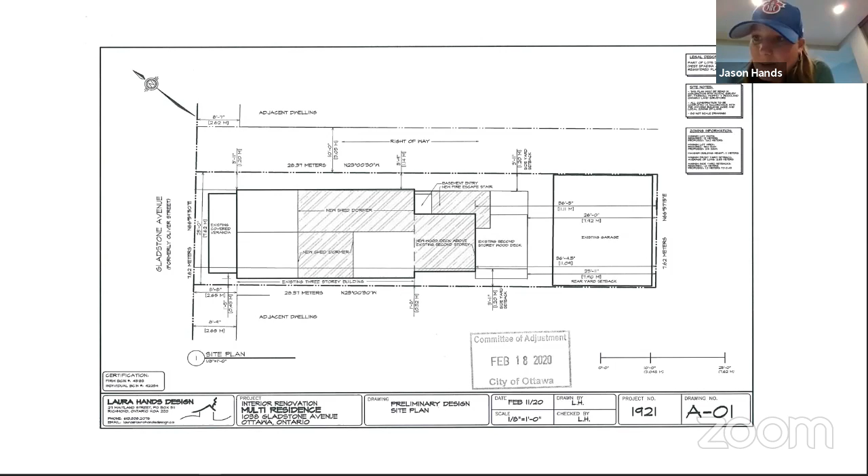And then our last minor variance would be for amenity space. So in the rear yard, we would like to add amenity space for 34 square meters, where the bylaw requires a minimum of 45. But we would like to gain some space by using the second floor deck that is existing, as well as creating a third floor deck for the third unit up on the third floor. So we would gain an additional 13.98 square meters on the second floor and an additional 14.60 square meters for the second and third floor decks. That's 28 square meters of additional amenity space not at grade.

That is correct, yes. Do we have elevations for your project? Yes, there were elevations that were submitted with the whole package. Oh yeah, there you'll see. You're looking at the front, well, and the rear elevation. And side elevations? That's correct. So that would be the westerly side here that you're showing.

So the existing deck is at the second floor level? Yes, that's correct. And the new deck- however, we're going to be creating a third floor deck as well, because this is going to pose as a secondary exit for the third floor unit.

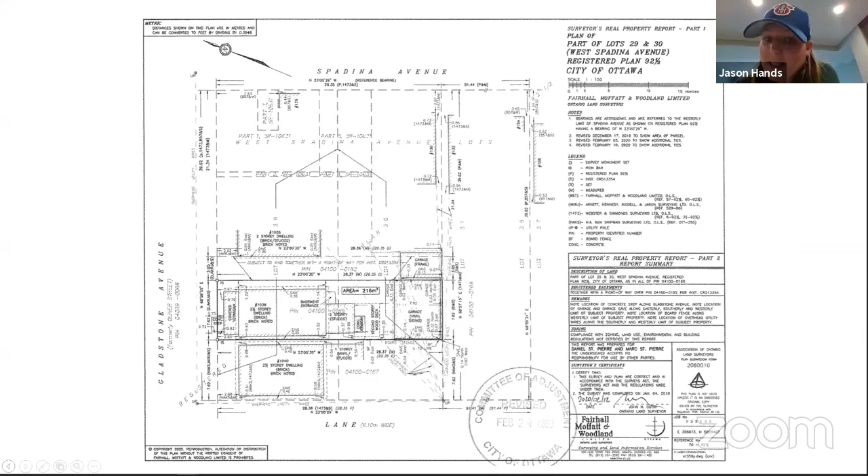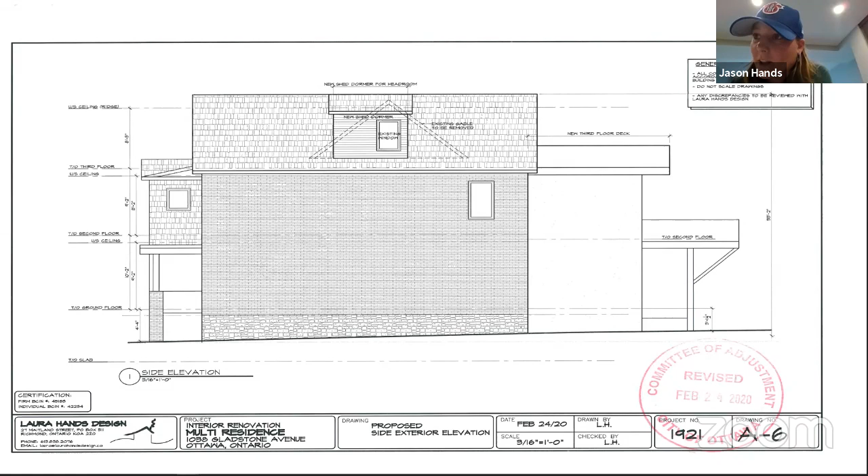And what about privacy screening for that new deck on the third floor? So privacy screening will go up on the west side. On the west, yes, this side. A privacy screen will go up on the third floor deck. And how tall will that screen be? That screen will be 5 feet in height. Okay, and only on the west side, not on the east? This is correct. We're quite a ways from the property line on the east side, and the privacy screen will be required on the west side on the third level deck.

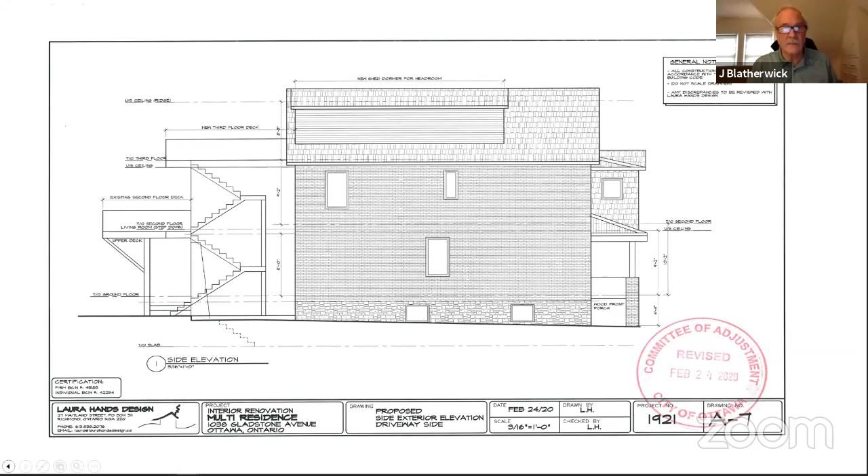There's no privacy screen on at the existing second floor deck level? No, so that deck. Is there an intent to put a privacy screen on that particular deck, the one that's existing? Yes, and the same height as the one for the third floor? That is correct.

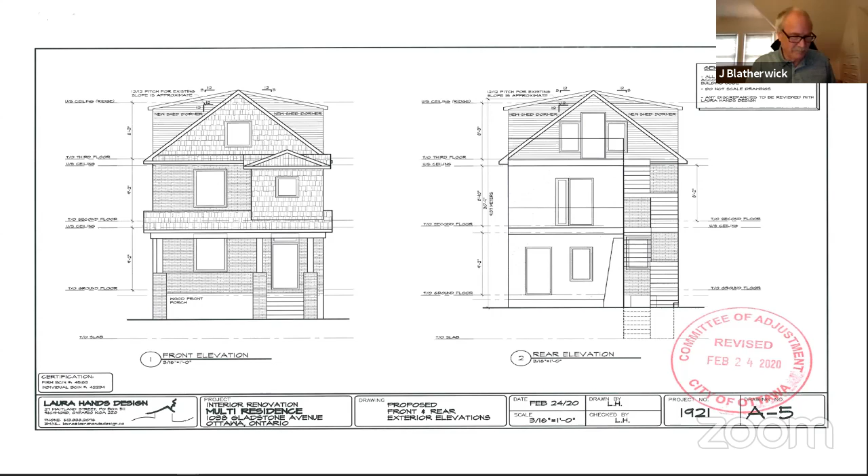So in your opinion, your application meets all the 4 tests of the Planning Act? Yes, it does. And how would that do that? Just one moment, so I just need to go run and get my file for that. Sorry about that.

My variances are minor. All of them, except for the amenity space, is existing conditions. My variances are appropriate for this development and use of the property. No new setbacks are being requested. Only existing conditions are going to remain.

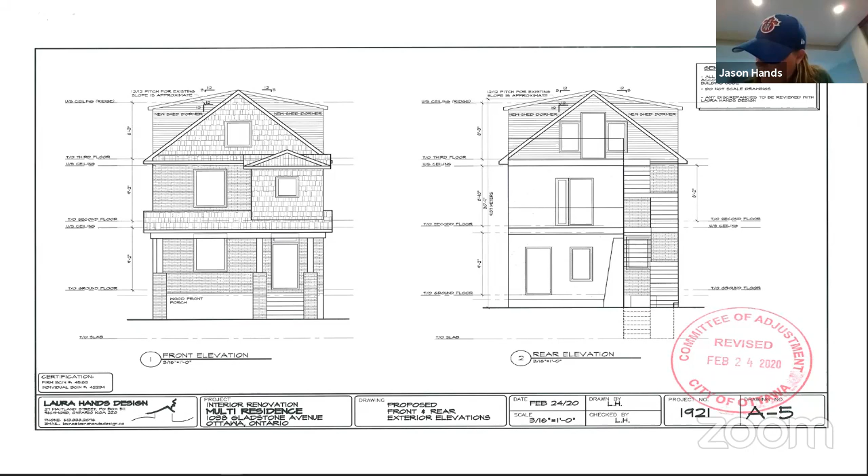The intent of the zoning bylaw is maintained. And the official plan is also maintained because we're going to construct a legal triplex to maintain growth within the urban area.

You were aware of the comments from Building Code Services to obtain a permit prior to construction? Yes. And Hydro Ottawa maintaining clearances to the overhead area? Yes. And from the Ministry of Transportation of Ontario, their approvals and permits are required prior to construction and or demolition of any buildings and or structures, and prior to the issuance of any municipal building permits or approvals. So they request that they are circulated with all proposed changes and development to the subject lands. You're aware of MTO's request? Yes, I emailed the Committee of Adjustment and they sent me all of the paperwork.

We also note that there is a letter from the Hintonburg Community Association in support of your proposal. Yes, I had met with them some time ago, possibly about February. In one of their meetings, I brought the drawings and explained everything we have discussed already today, and they were in favor of what we're planning on doing with the building.

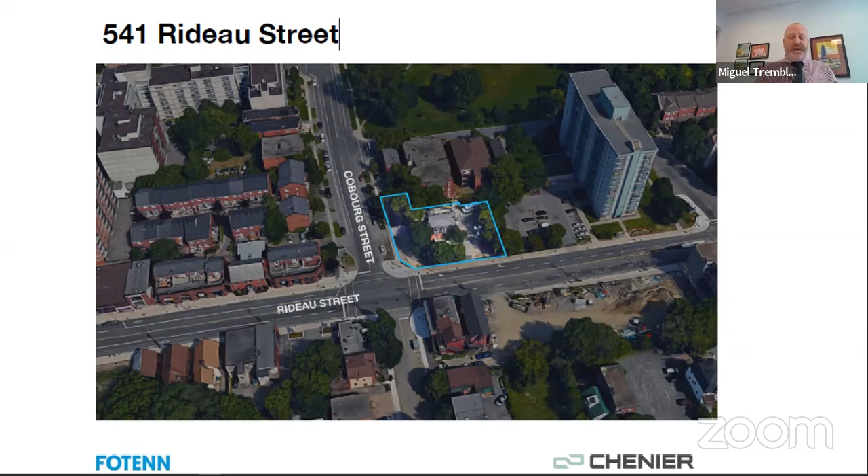Just in terms of history for this project, a zoning bylaw amendment was approved in October 2018. To be clear for the committee's benefit, the rooftop amenity space, although slightly smaller in that version, had consistently been shown on those plans. The issue, though, is that the zoning details approved by council did not fully reflect the rooftop amenity. It wasn't picked up by staff or us, and we were relying heavily on section 64, which in fact does not permit rooftop amenity space to project above the maximum height of the building. So site plan approval was issued in October 2019, about a year later.

But the rooftop amenity space was removed from the site plan so that building permits could be issued following site plan approval, with the understanding that at a later time we would have to seek a minor variance to construct the rooftop amenity area as previously shown.

Also, given that the zoning is still relatively fresh and not yet 2 years old, we had to seek approval from Planning Committee and City Council to be able to apply for the variance. So in November 2019, there was a staff report detailing what the variances were going to be, and it was approved unanimously by Planning Committee and City Council, entitling us to submit these applications.

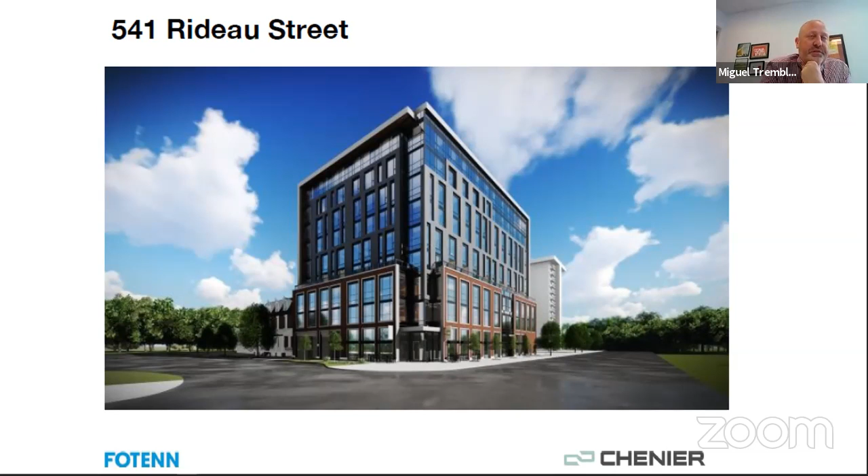It includes both amenity space on the ground level, and then all of the brick area you can see. This is not the site plan — I chose the building permit drawing just because it's a lot more detailed as to what's going on the roof. So I selected this plan, but all of the brick area amounts to about 129 square meters of rooftop amenity space. The rooftop amenity space is still permitted under the current site plan, current zoning, and current building permit.

But the desire now is to enclose the blue portion, which is about 90 square meters, and it would be immediately abutting and connected to the rooftop mechanical penthouse. All of the white that's enclosed there is part of the rooftop mechanical, which is actually larger than the area that we're proposing for the amenity space.

You remember there was an OCH building, that's to the right on your screen. The enclosed area of the amenity space would be about 6.4 meters from the edge of the building, which also coincides with the easterly property line, and then about 15 meters to the rear property line.

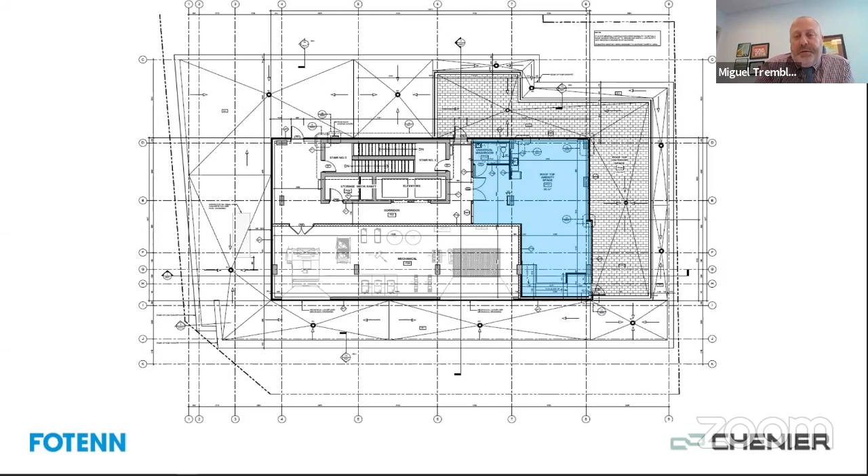So if you think back to the graphic I showed of the building elevation, it's more than unlikely that anybody would even see the area of the enclosed amenity area, given the perspectives of the building. Truly, the only people that will be able to see it are those in the OCH building on the upper floors.

So this is the elevation on Rideau Street. Again, it's seen at a vantage point that no one else will see, but the orange area corresponds with the area that's proposed to be enclosed, and you can see that it's the same height as the abutting mechanical penthouse. The mechanical penthouse runs to the west.

It includes those little beige sheltered areas and even a projection above and beyond that. But the intent is to simply run the roof line of the mechanical penthouse, incorporating it into the architecture of the mechanical penthouse, so it'll be roughly at a height of 4.8 meters, matching the abutting mechanical penthouse.

Actually, when council originally considered the zoning bylaw amendment back in 2018, the rooftop mechanical was shown on those plans. So council, on two occasions now — when they approved the zoning in 2018, and again when they allowed us to move forward and submit for the minor variance — considered it and felt it was appropriate, still maintaining the intent of the OP for a 9-story building.

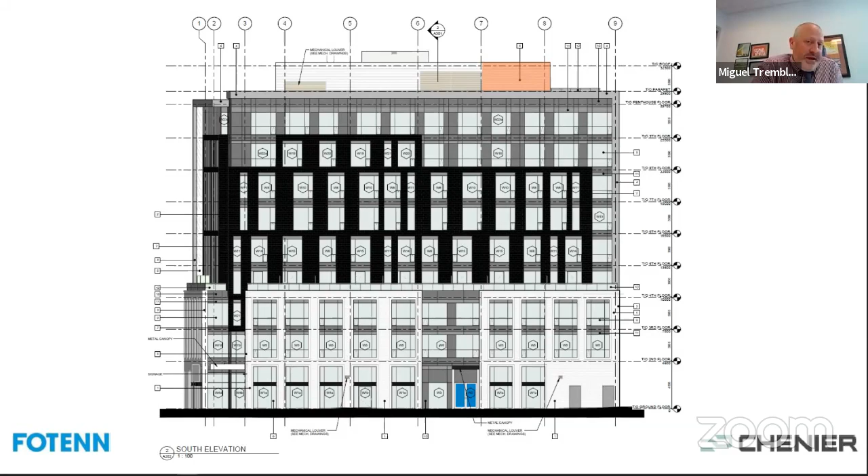And in terms of whether it's minor in nature, my intent is always to measure whether it's minor in terms of impacts, and I can't distinguish, nor can staff, any adverse impacts on abutting properties. So, anyway, that's my presentation. I'd be happy to answer questions.

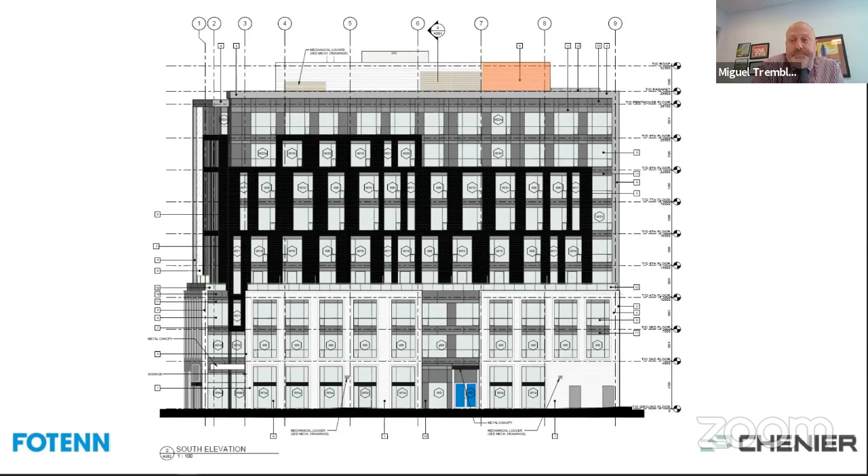You mentioned that the mechanical cap was approximately 4.8 meters higher than the deck. Is that an actual height, or an approximate height? No, I measured it from the building permit plans.

Does any of the members have any questions regarding this application? No, no, Mr. Wildman, no. Ms. McLean, Mr. Wilder, no, okay. Excuse me, Chair, Ms. McLean has her hand up for a question. Go ahead, Ms. McLean. Oh, I can't hear her, she's muted. Try now, Heather. I'll ask the question again.

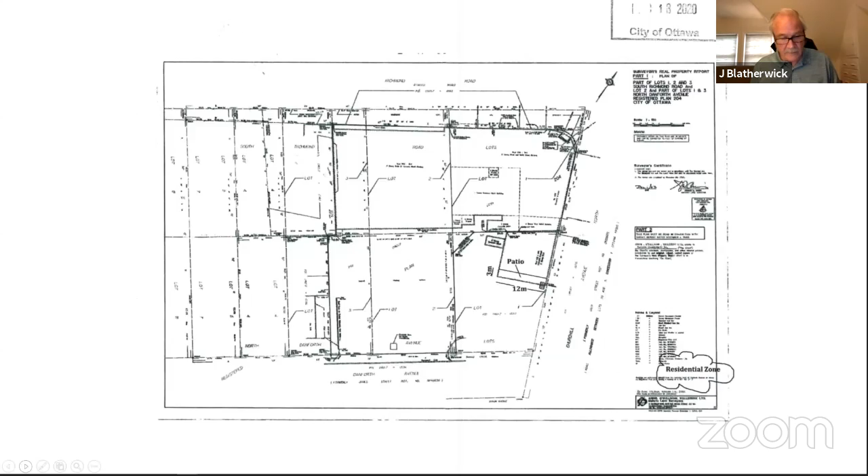This application is for a minor variance to permit an outdoor commercial patio with a seating capacity of 20 persons, to be located 12.3 meters from a residential zone without a screen or structure separating it from a lot in the residential zone. This application is for 412 Churchill Avenue North.

Before you proceed with your application, Mr. Dunstone, we have one question: has this patio already been built? It's actually been existing for about 12 to 15 years. What happened recently is the patio underwent a facelift. There was no alteration or structural changes to the piers or supports, so basically essentially new wood, but for all intents and purposes the patio has existed for many years.

And that was a legal patio that existed for many years? Not sure. The reason we bring a variance today is because we're applying for a liquor license, and a number of municipal approvals now kick in, as you know. We do have a letter and stamp drawing from an engineer which shows the patio is sound and built in accordance with building code.

Well, if you'd like to proceed with your presentation, Mr. Dunstone. Thank you. So we have a patio at the south side of Equator Coffee Shop, on the west side of Churchill. You enter the patio at grade off Churchill. A patio operating with a restaurant obviously needs to meet the zoning bylaw, which currently it doesn't.

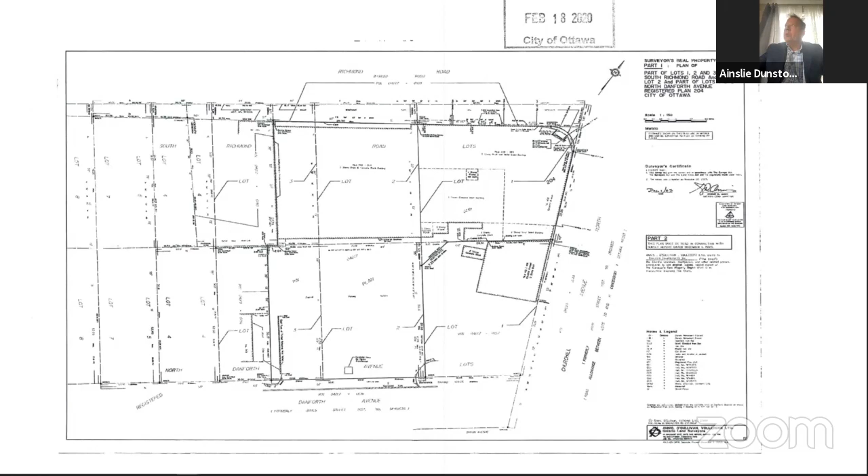Residential lot. We are proposing, as you mentioned, 20 patio seats, fairly subdued hours of operation, in line with the hours of operation of the cafe currently, which are 7 a.m. to about 6 to 7 p.m., or 11 p.m. between the months of April and October, patio season. So which time frame is it during the day? Is it closing at 6, 7, or 11? 11. And that's 7 days a week? 7 days.

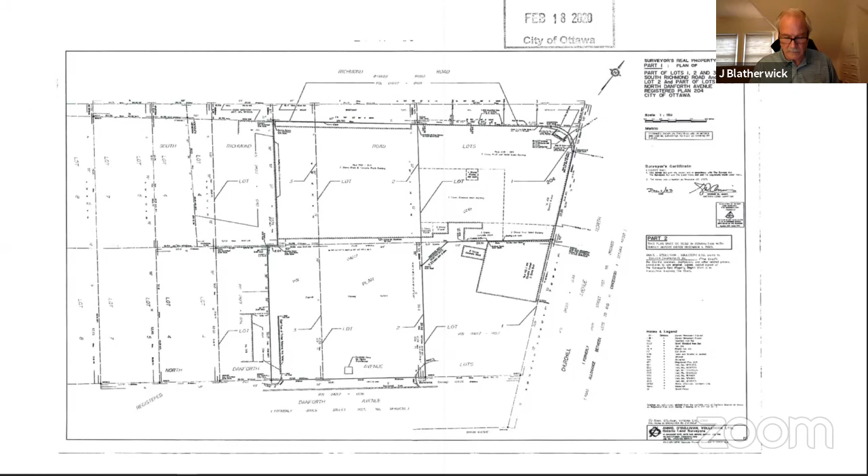We have a frozen feed. You still hear me? I'm here, yeah, we lost you there for a second. So the hours of operation are up till 11 - what time again, starting? 7 a.m. to 11 p.m., 7 days a week. Okay.

And you intend to serve liquor on that patio? Yeah.

The lighting will be very minimal and very subdued, like wall lighting, just enough lighting for safety purposes. Music as well will be very subdued and will cease at the time of patio closing.

You have a design for this patio? What's it gonna look like? Everything I do, everything's been filed with the committee. Okay. And that's the site plan right now? That's right, that's the engineer's drawing of the patio.

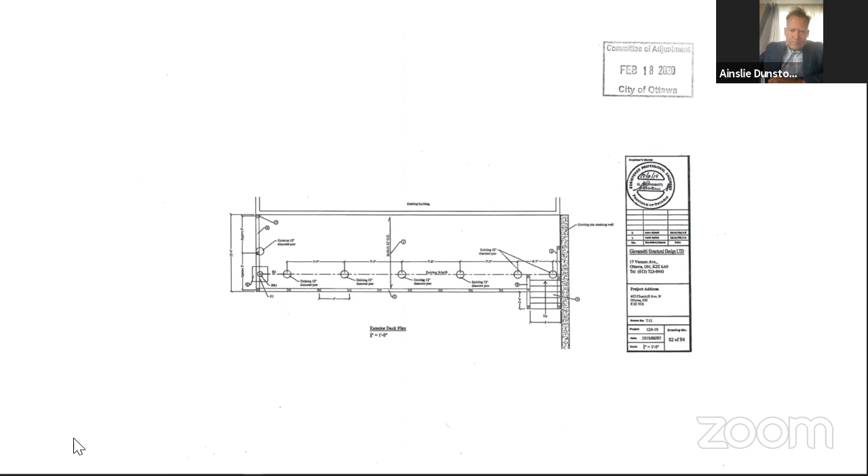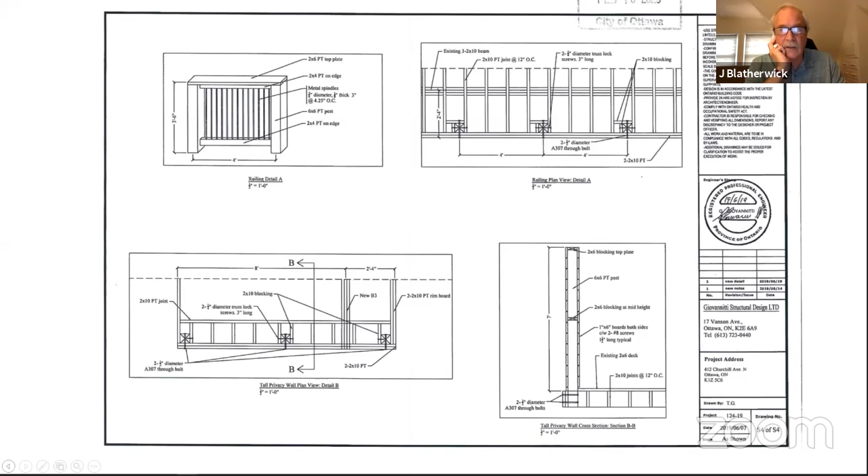If you have additional file plans, I can show you. So this is just the structure of the patio. And the walls on the periphery of the patio are how high? They are 36 inches - the railings surrounding the patio are 36 inches high.

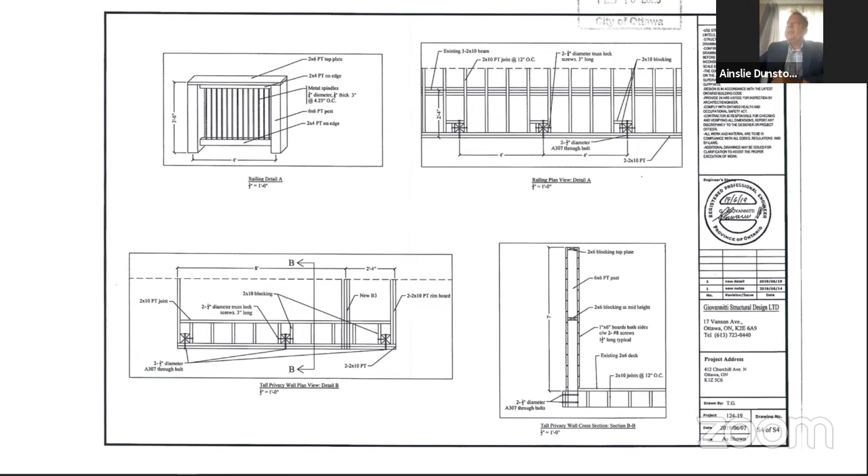Right. And how close is the nearest residential property to the patio? It is 22.3 meters to the closest residential zone, and that would be to the southeast of the patio.

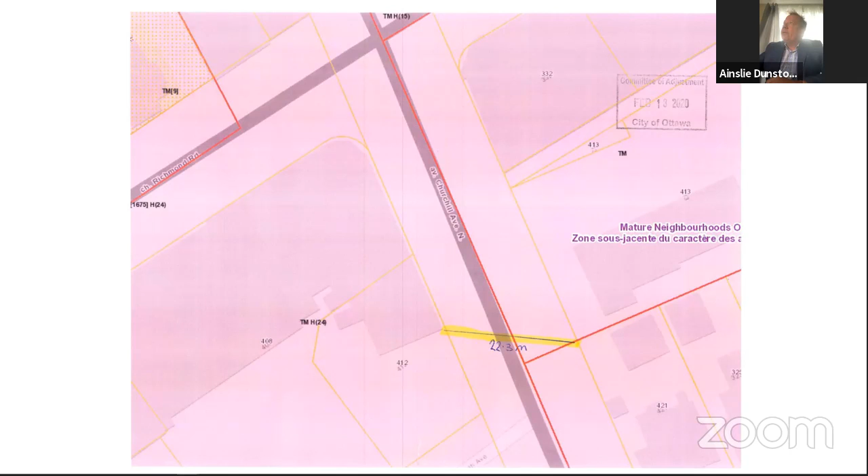Now, however, the first two buildings, the first two squares just south of the red line, these are commercially occupied buildings, businesses, design companies. So although it's in a residential zone, there are no residents in that building. So I took it to be the first immediate actual resident buildings to be the buildings on Byron Place to the south, that being 474 Byron Place, 470 Byron Place, and then 325 Byron Avenue, and 21.

Is there anything more that you'd like to add to your application? Well, in my application cover, I did address the 4 tests. And if you wouldn't mind just reiterating that. Sure.

It's a general zoning bylaw. A licensed cafe is a permitted use in this zone, and a licensed patio should be operated in connection with this cafe. Also, the subdued and mild lighting and low background music will ensure that the intent of the bylaw is met to protect the peace and privacy of residential neighbors. In addition, as I mentioned, there are other examples of licensed patios in the immediate area as well.

All right, welcome. Mr. Donkin, are you going to be making the presentation? Yes. This application is to permit minor variances to permit the main door of a newly constructed home not to face the front lot line and not to face the street, to permit a reduced lot width and reduced corner side yard setback. It is proposed to demolish the existing dwelling and construct a 2-story detached dwelling with a secondary dwelling unit in the basement. So if you'd like to proceed with your application, Mr. Donkin.

Yeah, the first and most difficult variance is the main door, which comes from the infill bylaw. It says that the main door has to face the front of the lot, which is deemed to be the narrowest frontage. So in this case, it would be required to face Byron. We thought it was more appropriate for it to face Kensington. So although the request says it doesn't face the street, it does face a street, Kensington.

Yeah. We did that for a couple of reasons. One is it takes foot traffic off Byron, which makes it a little bit safer. It allows us a more efficient plan on the house itself. And it's a more desirable address being Kensington than Byron.

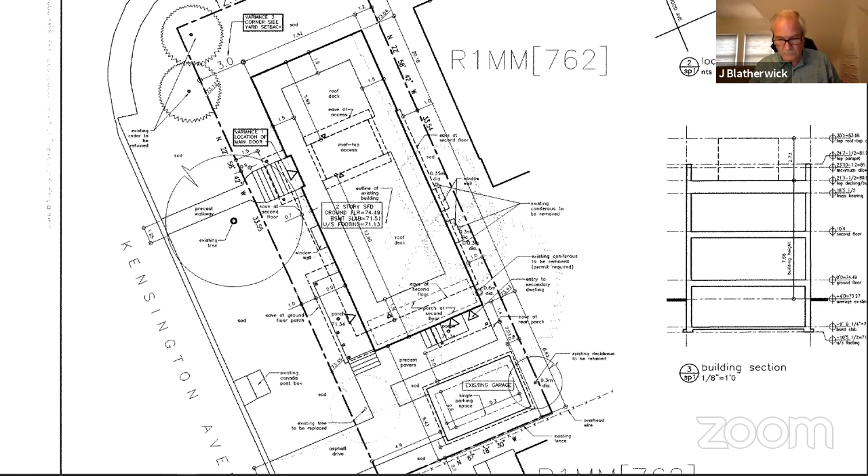The second two variances really come from the size of the lot. The lot is 12 meters wide rather than the 15 that's required. Another part of the infill bylaw says that the corner side yard has to meet the setback of the adjacent dwelling on the side street. Doing that would reduce the buildable width of the lot to about 20 feet, which would make it impractical to develop the lot. So we've asked that that side setback on the corner side yard be reduced to 3 meters, which is what the underlying zoning bylaw asks for.

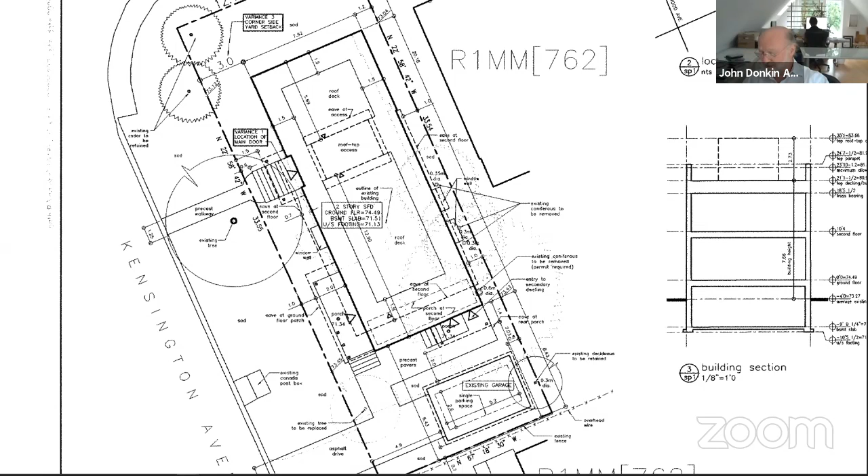The main issue in terms of its relation to the neighborhood is really at the south end of the property and its relation to the other houses on Kensington. If you could show SK 005, it shows how we've tried to deal with that. We've... 005.

There we go. So we're keeping an existing garage. It's going to require repair, but it's reparable. And then we pulled the house back as far as we can from the garage and basically took the massing of the house down as we came south. So that's how we're trying to deal with the neighborhood issue.

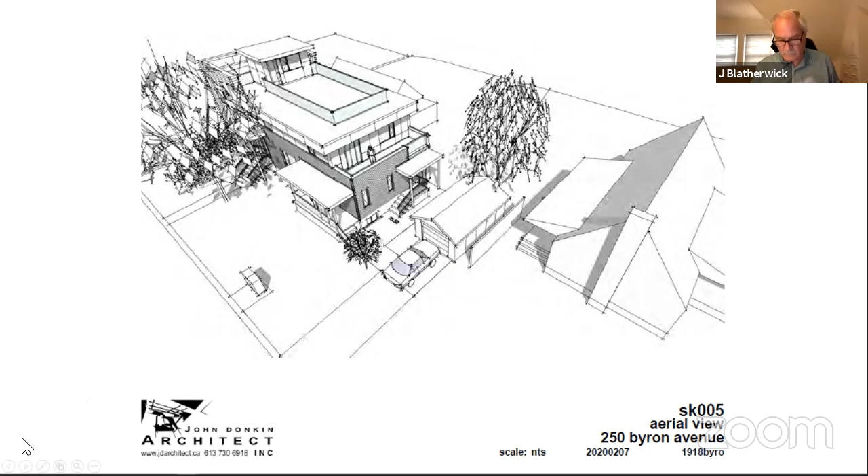In terms of the width of the lot, it is 12 meters. There are a number of lots nearby that are that small or smaller. Do you have any lot patterning evidence to support that comment? Yeah, that would be SK 003. There we go. So that shows the widths of nearby lots.

The other thing about the reduced corner side yard setback is the 3 meters is actually in line with the existing building. So in that way, it continues the existing pattern.

You're aware of the comments from forestry regarding the sugar maple? It's supposedly in decline. Yeah, it's a really big tree and it is in really, really rough shape. I don't think we would be happy... In particular, I was talking to Mr. Cutler from the Community Association yesterday. We'd be happy to do what we can to keep it.

We're somewhat limited because it's on city property, so I don't know what kind of interventions we can do. We can certainly do the usual street protection, tree protection. One might be able to extend its life a little bit with an arborist. We'd have to work that out with the city since it's their tree, but we'd be willing to do so. Okay.

All right, you're aware that Hydro Ottawa's comments regarding maintaining safety offset clearances, I'm assuming? Yeah, we meet their requirements. Okay.

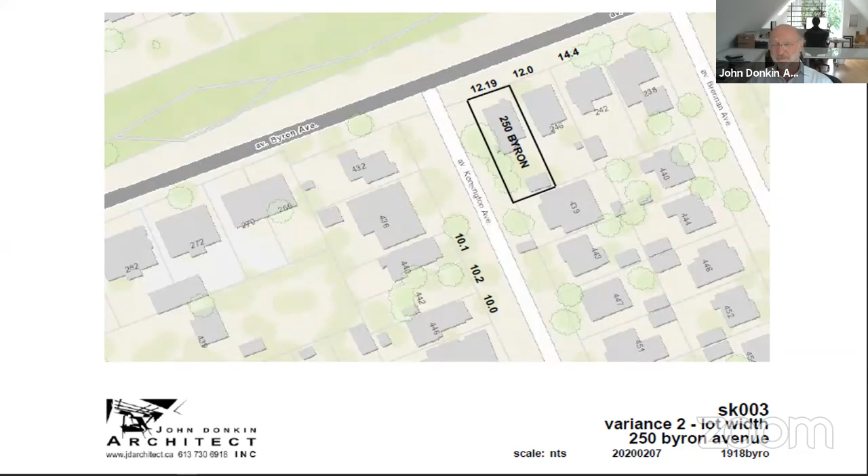Well, we did contact the councilor and we contacted the community association. The community association came back to us with a set of questions which we answered back in February. And then I spoke to Mr. Cutler yesterday morning after getting his comments on Monday. He seemed happy with all the building issues. His main concern seemed to be the trees.

So you've talked to the immediately adjacent and abutting neighbors? Yeah, my client spoke to, he tried sort of 5 different houses, managed to speak to 3 of them. Up till yesterday, we had no concerns from any of them. This morning, I got another letter from the house immediately to the south. Their concerns again were the parking, the trees, and they also would like the setback to be equal to their setback, which, as I mentioned, makes development impractical. Well, the setback that you're going to be providing is approximately what's there right now, correct? Yes, that's right. Okay.

I think we have a request to speak from Mr. Wilder. Mr. Wilder?

Question I have too, the secondary dwelling unit, is this going to be for a family member or is this going to be a rental unit? What are the owner's intentions? I really don't know. It's obviously set up so it could be for a rental. So it's not going to be like for an extended family member? It could be a rental. Not that I'm aware of. So that rental unit, if it's going to be a rental unit, may have a vehicle, right? It could have, yes. Possibility.

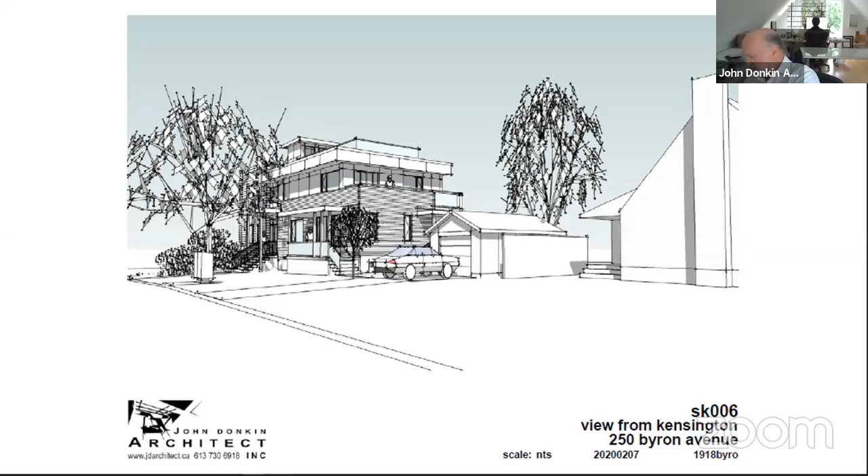The other question, the garage, I understand you're going to be renovating it. What type of separation exists now? I can't quite make it out. Is there going to be a privacy fence between that garage and the Dinnings property next door? There's actually an existing privacy fence that's well over 6 feet high that the owner of the property to the south put up because the garage has been a bit of an eyesore. Yeah, you can see the fence there. That's existing. So that fence will remain. What is the separation between that side wall of the garage and the fence there? Is it a meter or? It looks about 4 feet, I don't know exactly. The survey would tell me. I see. Is it your intention to reclad the garage as part of the renovations? Yes. All right, thank you.

Okay. All right, Mr. Donkin, could you address the 4 tests, please? Yeah.

So the first variance, we aren't not providing a door on the street, we're simply providing a door on the second street that the building faces. I think that makes it minor. It's desirable because it makes pedestrian traffic on the site safer. It identifies the house with Kensington. It allows the parking and main entry to be within the neighborhood. It also increases the efficiency of the building itself, and it increases the value of the developed property because of the address. Those are why we think it's desirable for appropriate development.

General intent, the idea is to blend in with the streetscape, and we think we've done that by managing the massing of the building and by rolling the entrance around to the residential street.

Byron is pretty rough. When you go to the west of there, it becomes apartments. So we think we're identifying quite well with the neighboring streets.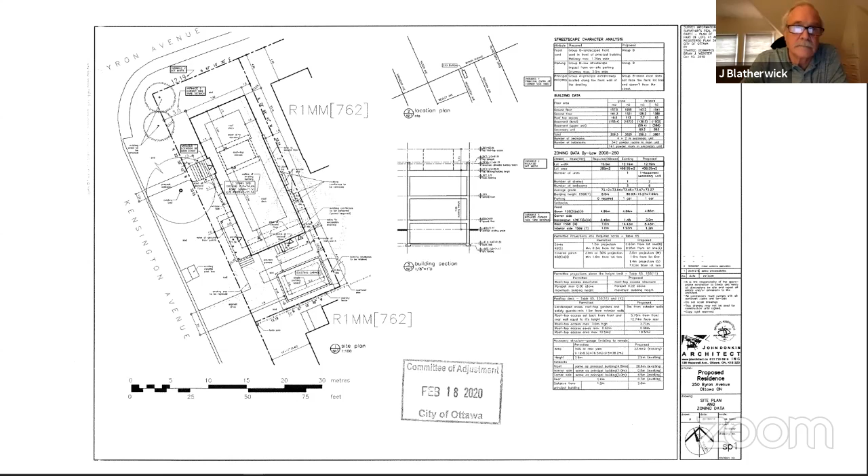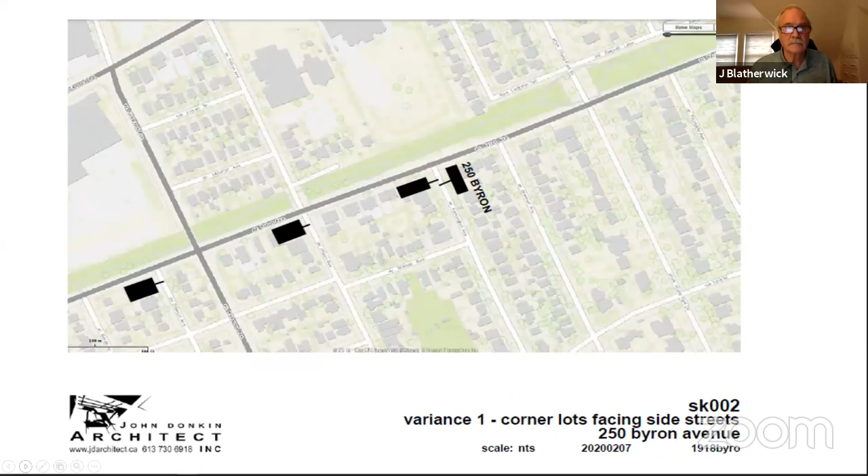Most of the root area of that tree is actually going to be unaffected. Normally what you try to protect is everything underneath the crown. The circle on there is the actual size of the tree, so we'll be skimming some off the northeast edge, but the rest will stay grass. In terms of the sidewalk itself, if you look at SK008, it shows the relation of the front door to the tree - it's not actually facing the tree. The sidewalk, limited to about 4 or 5 feet wide, will run beside the tree, so that'll have some effect on it. But even then, if we do precast, we're only going about 6 inches into the dirt, so I think we can do what we can to preserve it.

My impression on site, and from the report from forestry, is that really the problem is structural - the entire center is rotting, and they're probably concerned about branches falling off. If that were on our property, we'd be able to tie it together and probably extend its life. I don't know that we'd have the clearance to do that from the city, given it's their tree. I don't know that the city would be willing to do that, although we'd be happy to cooperate with that if it happened.

I think we like the tree. When you think of selling this house, a house with a great big beautiful maple tree beside it is highly desirable. So we'll do what we can to keep it up for as long as we can.

Correct me if I'm wrong, but you're going to dig out the foundation of the old home that's already on the site? Yeah, there'll be an area probably 4 or 5 feet wide beside the existing foundation towards the tree, so it will be somewhat into the root area, but not a long way. But that foundation, the current foundation, is in the root area anyway, correct? Yes, because the new home will have pretty much the same foundation line as the current house has.

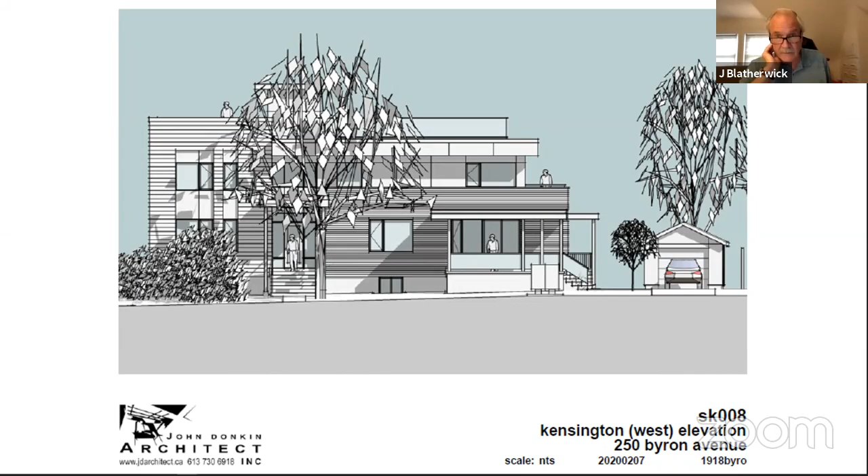The only thing is that in order to excavate it, to keep people safe, we have to take it out about 4 feet so we can get the formwork in and things. But the foundation will stay where it is now. All right, that's an absolute necessity to go out 4 feet towards the street?

It's a call that has to be made by the contractor. It depends on the nature of the soil, and it depends on the safety of the workers. So if you had extremely loose soil, they'd have to go back at 45 degrees, which would probably take them 5 feet or so. If you've got really dense soil, then you may be able to do it at a steeper angle.

As far as the excavation goes, the less dirt you move, the less it costs you, so the tendency on the part of the contractor would be to keep his excavation tight to the foundation. So this could be done possibly with minimal impact to the existing tree. We'll minimize the impact insofar as we can.

Okay, thank you. Mr. Wildman, you had a question?

In light of the comments from the delegation and from the owner's agent, and the willingness to preserve the tree, it would seem fairly easy to add a condition that says the owner shall coordinate construction activities in a manner satisfactory to the City of Ottawa's forestry services. I take it from your comments that you really wouldn't have any objection to that, would that be correct? No, that would be fine, I've discussed it with my client previously, and he's good with that.

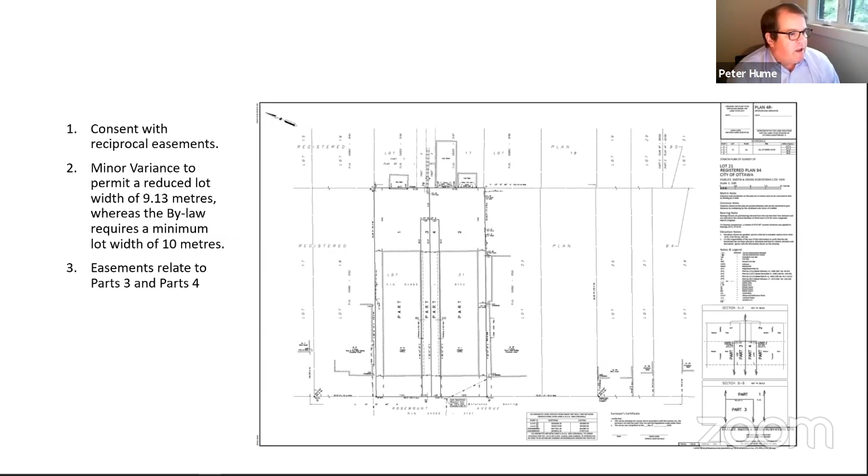So if we could go to the next slide, which is the reference plan. The reference plan shows you the parcels that are being severed and the parts that will become reciprocal easements. So it's part 1 and 3 with a reciprocal easement of part 4, and parts 4 and 2 with reciprocal easements to part 3. So if we can go to the next slide.

Is your signal strength fairly strong, Mr. Hume? Because we lost you there. It should be fine. I can move a little closer if that helps.

So this is the original site plan that was filed with the application. You can see the outlines of the buildings to be demolished. You can see the 2 long semi-detached dwellings and the 2 parking spaces in the rear. At the request of the community association, we added 4 trees, 2 in the front and 2 in the rear.

And so this was the application that we went before to the public meeting with. At the public meeting, there were 2 real schools of thought. One of them was they liked the application, they liked the parking arrangements, and they wanted us to plant the trees, specify the calipers, and show them on our plan, which we did.

We had another group of residents who were very concerned that we weren't providing more parking for the long semi-detached dwellings. And in order to undertake due diligence to make sure that we're transparent with the committee, we did look at that, and I'm prepared to show that to you now. Although we can accommodate it, unless it's a real desire of the community to have us undertake this, it's probably not the optimal solution. So if you want to go to the next.

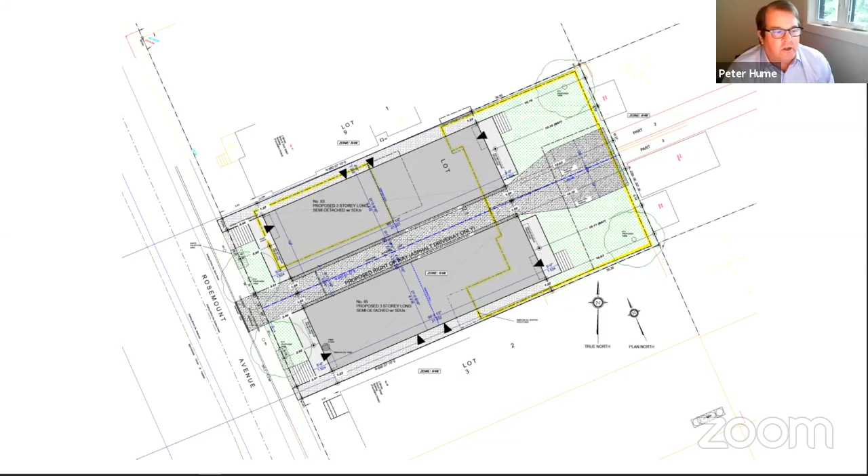So as you can see, the parking starts to dominate the rear yard. It's not something that we filed with the committee, but this was an outcome of the public consultation, and we thought it fair to share it with you.

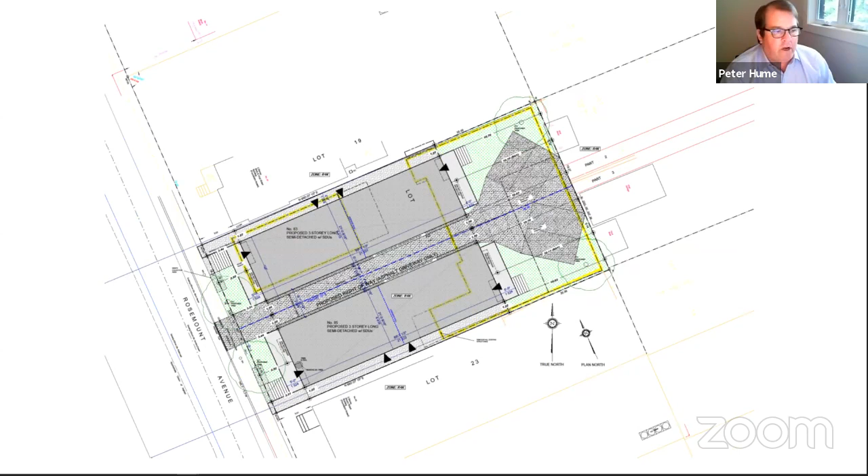So when we started to look at the street fabric, we undertook a streetscape character analysis, and we looked at how many similar type lots and lot fabrics there were. When we canvassed the street from Gladstone to the dead end, there were approximately 10 lots of the 25 lots in total that were 9 meters in width, with varying driveway widths from 2.9 to 4.5 meters. So we're adopting a very similar lot fabric to what exists on the street today.

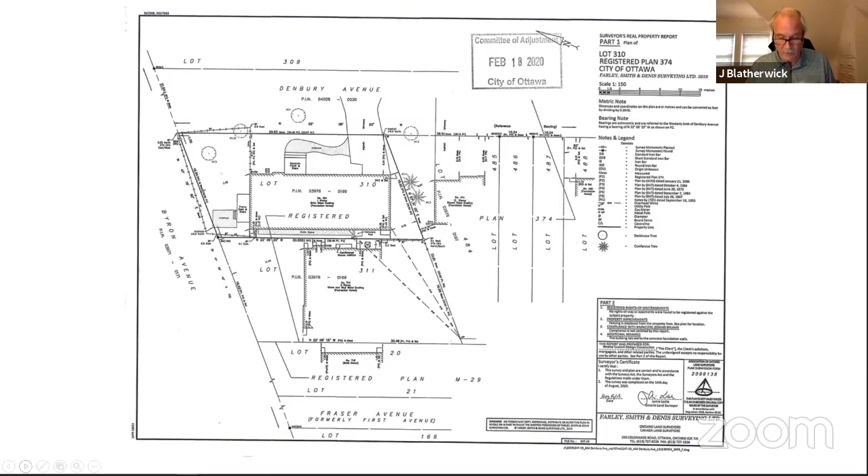Yes, all right. If you'd like to proceed, Mr. Mason. Absolutely, now that you guys can hear me, I can move forward. I can hear you just fine. I think everybody else can hear you too.

As mentioned, we are asking for relief from the setbacks for the front yard and the rear yard, which is a corner lot property with the corner side yard acting as the entrance to the home.

As you can understand, that changes the dynamic of the front yards and rear yards. The existing home is an 1,800 square foot bungalow that protrudes into the rear yard, reducing the rear yard setback from 7.5 to 1.27 meters at the smallest point.

And from the front yard, it reduces the requirement of 6 meters to 4.83 at the closest point to Byron Avenue. That's just the nature of the lot - it's a parallelogram and the home itself is a square, as you can see in the plans.

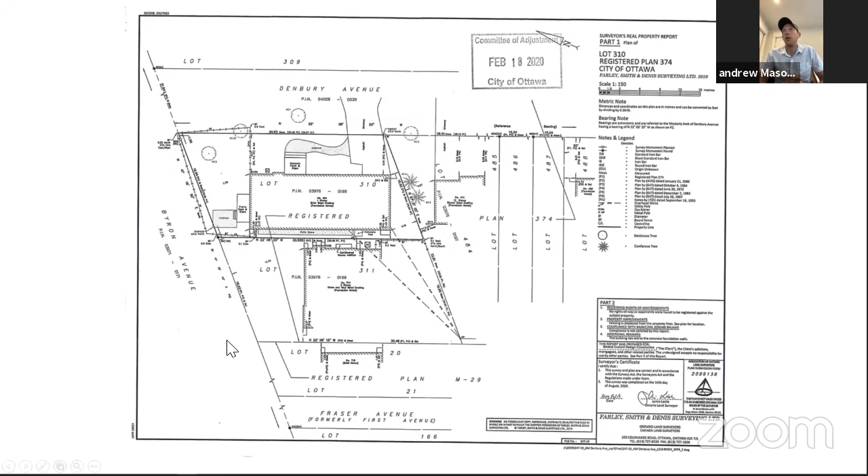Looking at the existing site plan, you'll notice how it lines up in the lot, and in the proposed site plan you'll notice the proposed home is actually being built adhering to all of the existing setbacks of the home, so we aren't protruding any further into any of those setbacks than the existing conditions.

This was done purposefully to minimize any change to the streetscape and the effect on the properties around it. The only difference is a slight perimeter change to the new building versus the existing building, and we'll be putting a second story on the bungalow to increase the livable space for the homeowners.

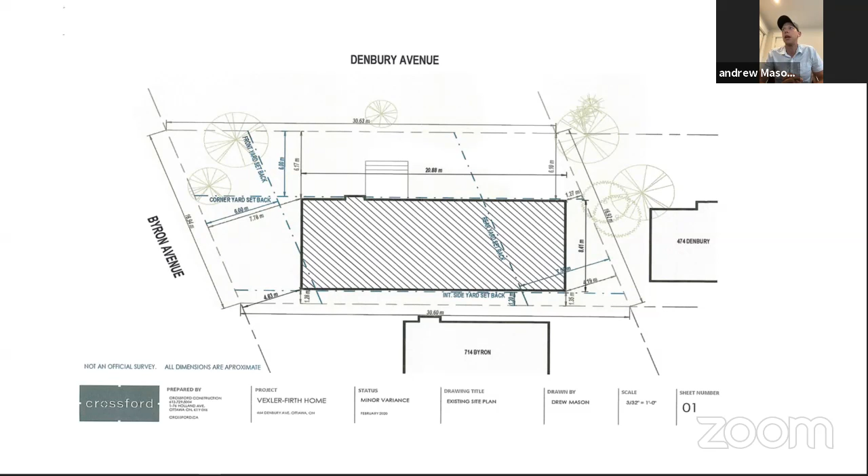In doing so, we made sure we limited the glazing facing both neighboring properties, 714 Byron and 474 Denbury. There will be a perimeter fence - one currently exists, and we will be reinstalling or maintaining the existing fence to shield any overlook onto the neighboring properties.

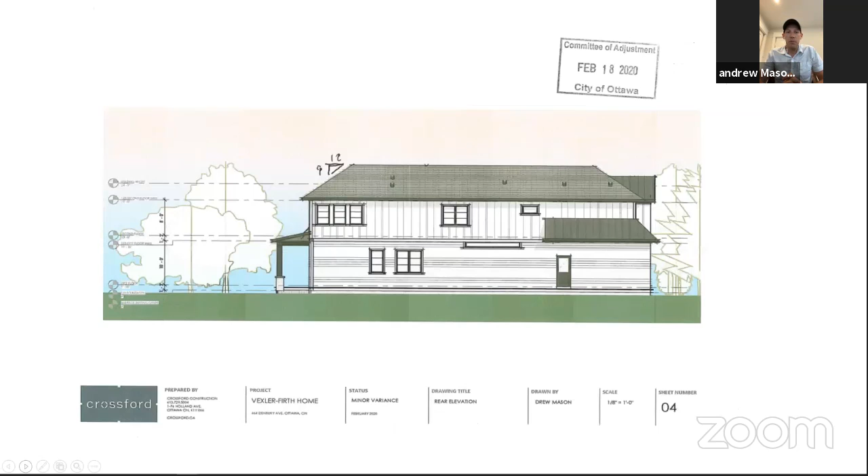We got some elevations of the proposed dwelling put up, please. Okay, so there you go. As you can see, that's the overall look of the property. It's maintaining the style, sort of a transitional but still classic styling of the home.

As I mentioned in the cover letter, other areas of the neighborhood are composed of bungalows, single family, 2-story detached homes, all different kinds in that area. In fact, the neighboring property at 474 Denbury is very similar in size, and maintains about the same amount of lot coverage.

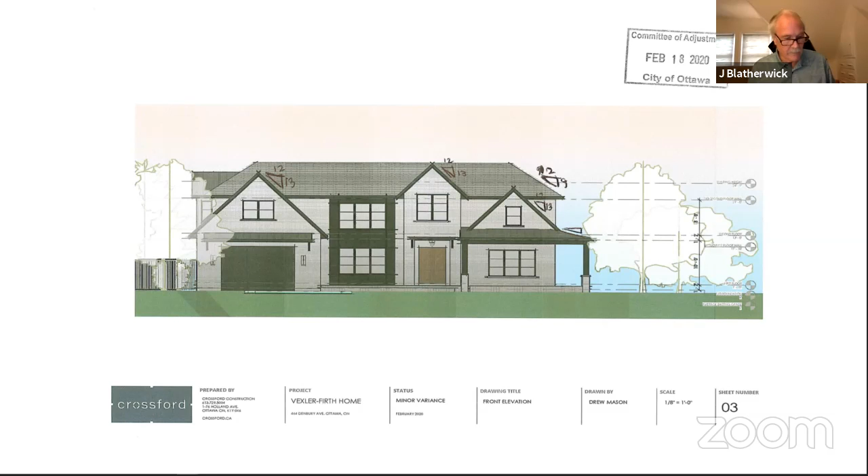And all of these variances reflect an existing condition. Exactly, all the variances are reflecting an existing condition. We aren't asking for any further relief for this property.

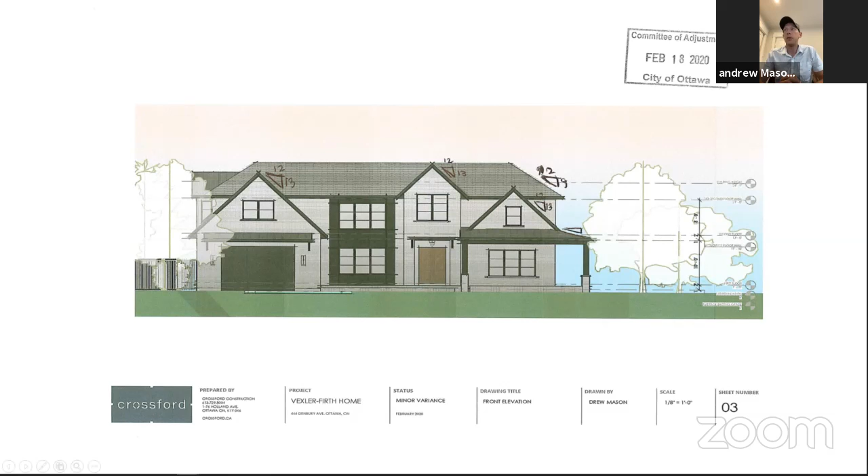I note that, well, Forrester, you said that 4 trees may be impacted. Absolutely, and if you look at the site plan - I did speak back and forth with Jason Chickwin at the city, who is, I believe, the forestry advisor on this, and actually had him go look at a few of the trees at that property ahead of time to let us know his opinion on it.

We did a tree declaration for him, a tree disclosure report, and sent that to him, commenting on the trees he's specifically mentioning, and told him that we would be installing modified protection. We have no intention of removing any of the existing mature trees, and do intend to install modified protection around them. The tree disclosure report may have actually been submitted with the minor variance.

I'm not sure if it has it - I might have done that, knowing these comments would come out. But we did speak with him about installing protection in the areas that may be affected by the excavation of the new foundation. How far out from the foundation wall are you going to be excavating?

So again, it's determined mainly by the contractor in charge of that, but I believe the standard is 4 feet. In the tree disclosure report we sent to him, there was actually a requirement to note the limit of excavation, which I noted on the plans to him, which is why he's aware of which trees may or may not be affected by it.

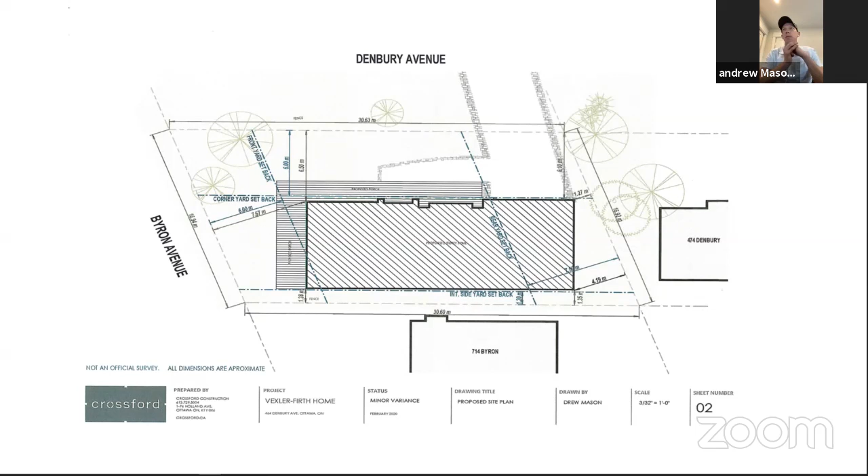Okay. All right. Staff is in concurrence with this application, I take it?

Yes, Mr. Chair, staff has no concerns with the proposal.

There are no conditions that have been requested, and no comments from neighbors or the local community association. We actually did individual visits to the neighboring properties to discuss the project. Nobody found any concerns with it, and everyone seemed to be in favor.

So you did your due diligence and talked to all the adjacent and immediately abutting neighbors. Absolutely. And just briefly, how does this project meet the requirements of the four tests?

As I noted in the cover letter, the application is minor in nature in that we are conforming to existing conditions already on the property and not asking for any further relief in the setbacks. The size and scale is consistent with other properties in the neighborhood, and we aren't affecting any major or distinctive trees, and any that are affected will be protected throughout the process.

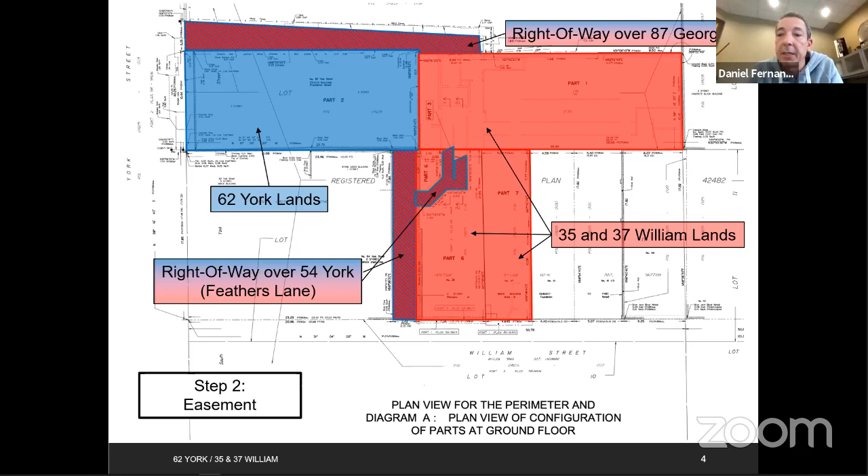So sorry, I understand your question now, my apologies. So what we're saying is it's reserved. So 62 York, in doing the lot line adjustment, yes, they're conveying the back piece, but they're going to reserve their easement back, in order to allow their continued access over 3 and 5. Okay, so 3 and 5 are located within the parcel that is being conveyed by 62 York to 35 William. Okay, thank you, sorry for not understanding your original concern.

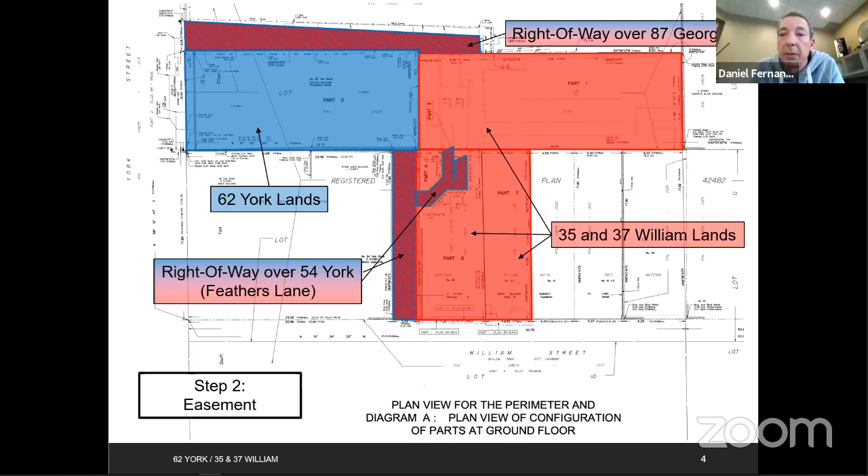Any other panel members have questions, comments? Back when this was originally adjourned, there was a requirement for a joint use and maintenance agreement. I'm assuming that has been done, written. No, that would be part of the conditions, part and parcel of what we have to do to satisfy the spatial separation analysis, also part of the conditions that has to be undertaken. Correct. All right.

Okay. All right. So Ms. Evans, is there anything else you would like to add to your comments? Not at this time, but if there are any questions remaining, I'd be happy to answer them. Are there any questions remaining from the members of the panel?

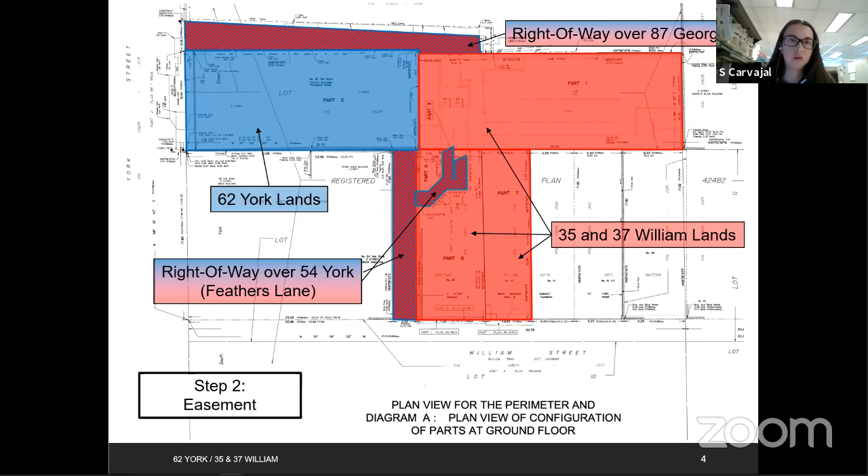Okay, and the city staff's position on this, on behalf of the department? Mr. Chair, the department has no concerns with both applications. All right.

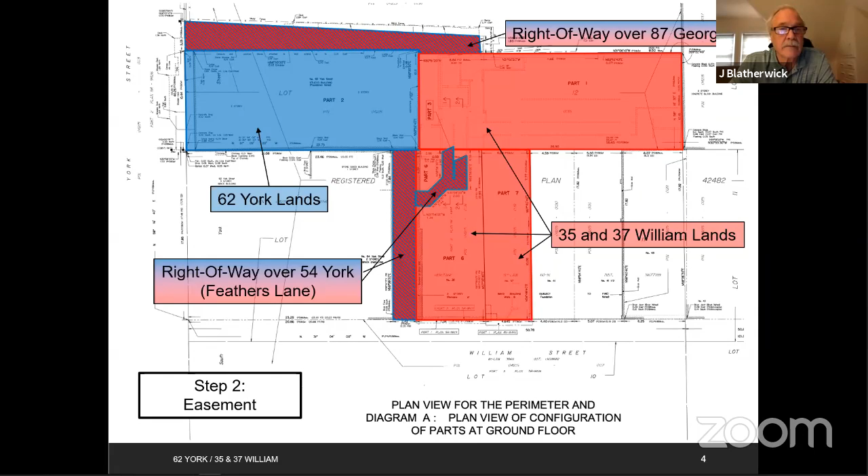I think myself and other members of this panel would like to reserve on this application, folks, so we can further discuss what's been presented to us. And if the rest of the members of the panel are in agreement, we will reserve the application. Agreed? All in favor? Yeah, I agree. All right, we're going to thank you very much for your presentation, ladies and gentlemen. The committee will reserve its decision, and you'll receive the decision within 10 days. Thank you very much.